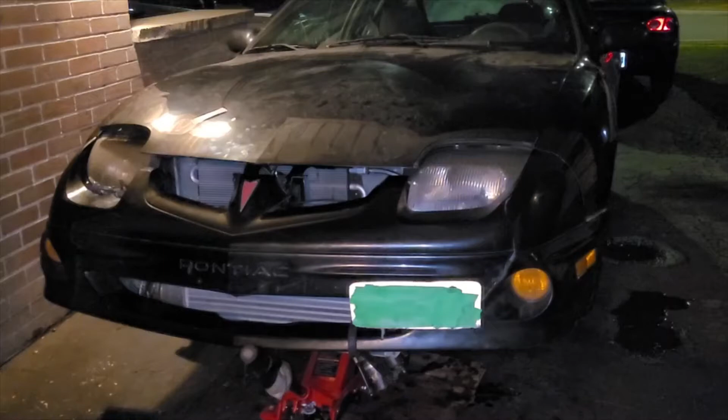Alright, Sunfire needs some maintenance. We had to pull the transmission earlier today. We were ripping it in second gear, we went to shift into third, and all of a sudden, limiter. Just bouncing off the limiter. So, transmission's gotta come out.

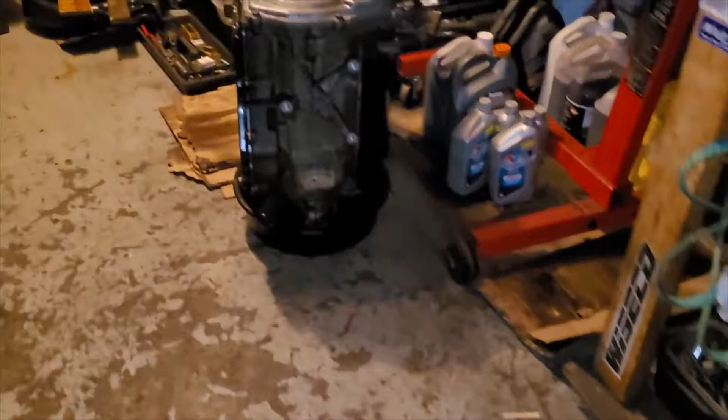As you can see, just the engine in there. For those of you that don't know, this is a 2.2 pushrod engine, and it's got the 4-speed automatic, the 4T40. Right over here, we have it out. It was bouncing off limiter at the top of second. Right when it went to shift into third, limiter.

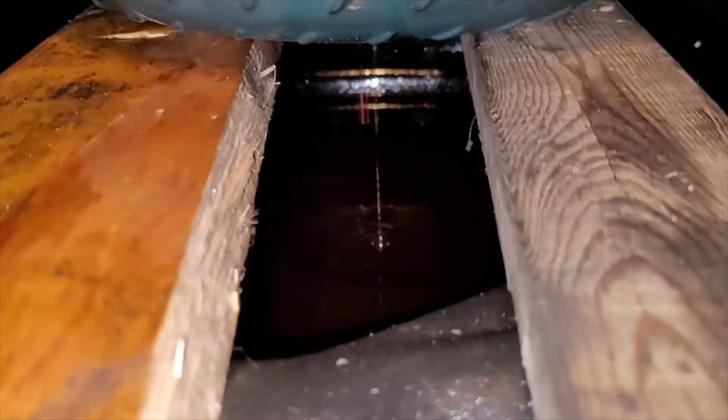So, we got it out. We got the converter over here draining. We're gonna see what the damage is. Here we go, we're gonna open it up on video.

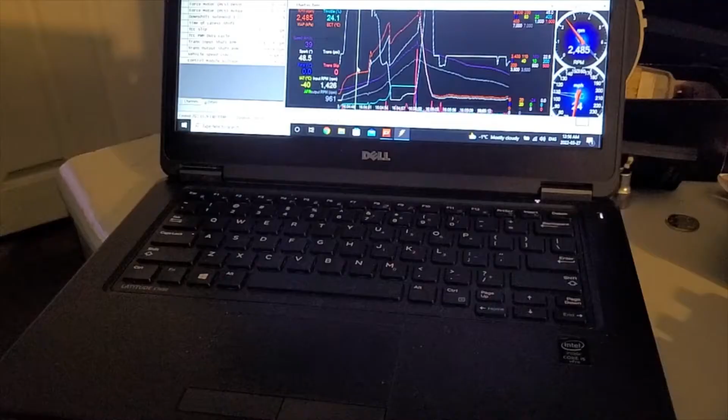So during this catastrophic transmission event, I was actually logging with HP Tuners as well as FuelTech. You can see here we start off the pull in second gear. It downshifts back into first, does the 1 to 2 shift right here. See, the red line is RPM. This is HP Tuners. Second gear, we rev it out all the way to about 6,400.

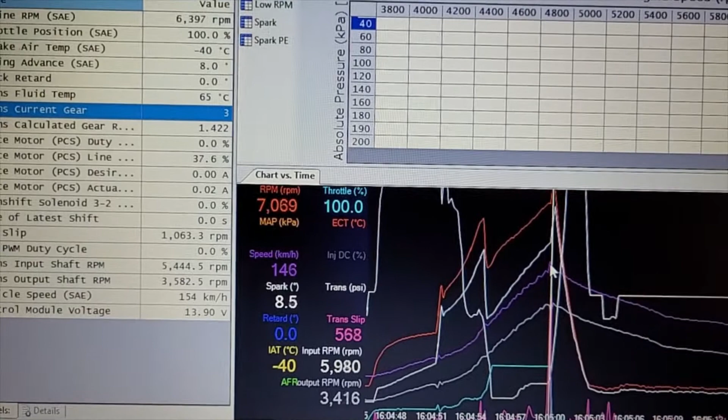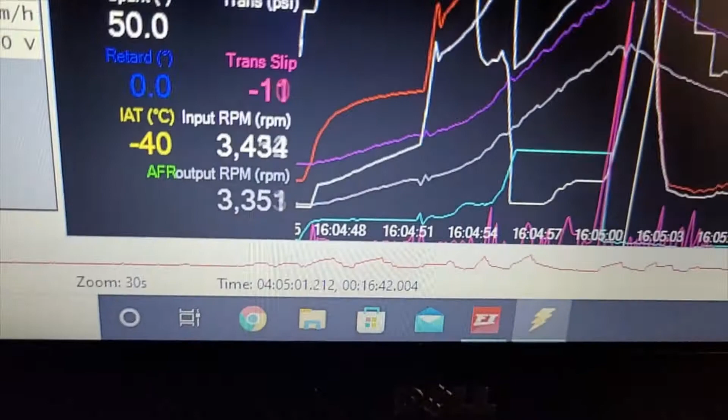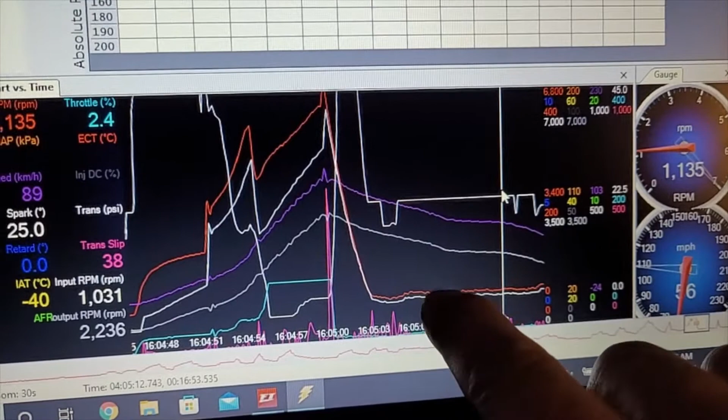Then boom, all of a sudden RPM jumps way up to over 7 grand as third gear hits. And that's it. After that, the power just falls right off. Input shaft and output shaft drop. One thing to note, input shaft and RPM are still close together. Those two lines right there mean the input shaft is not broken. That means something else, like the chain possibly.

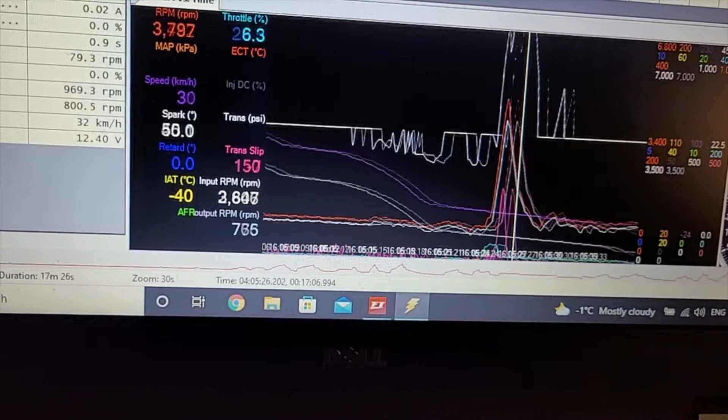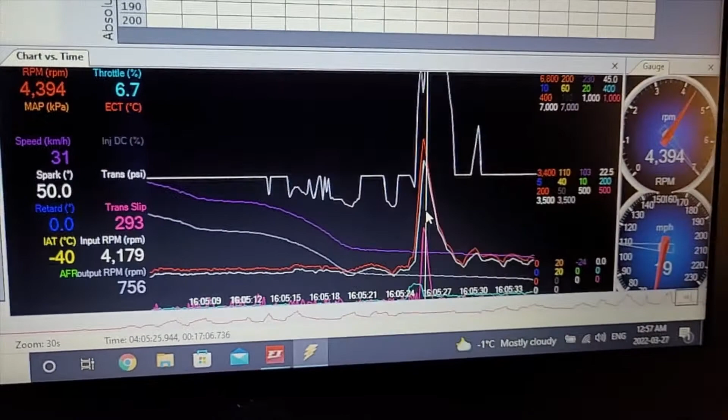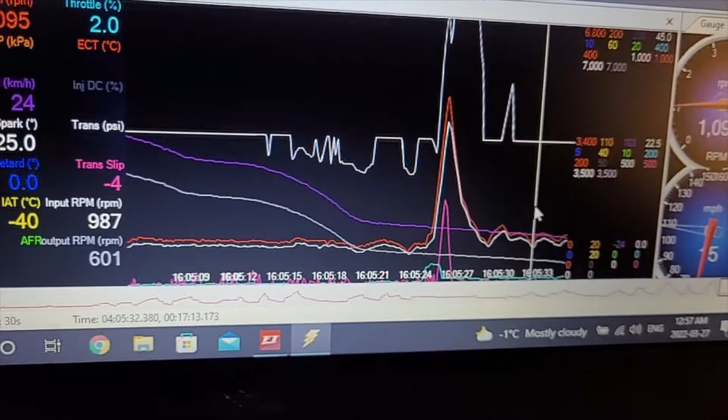So we can see as we turn, we did the right hand turn, then we revved it up a little bit there. You can see input shaft RPM comes up with RPM. That means the transmission input shaft is still connected to the engine, which is a good thing because we have that expensive input shaft in there. But output shaft basically just tapered off because that's tied to the wheels. That's basically wheel speed. Just tapered off and that was it.

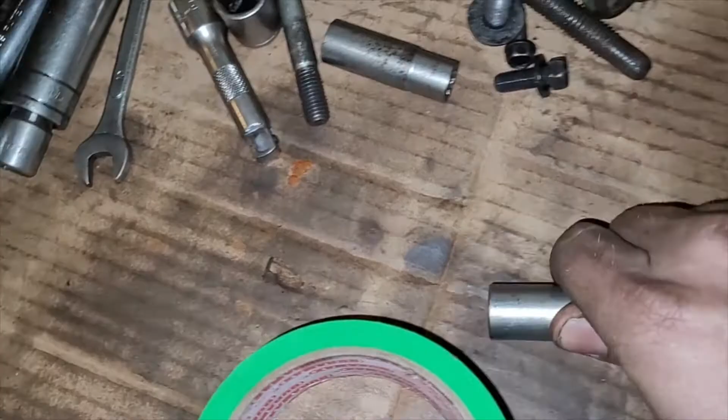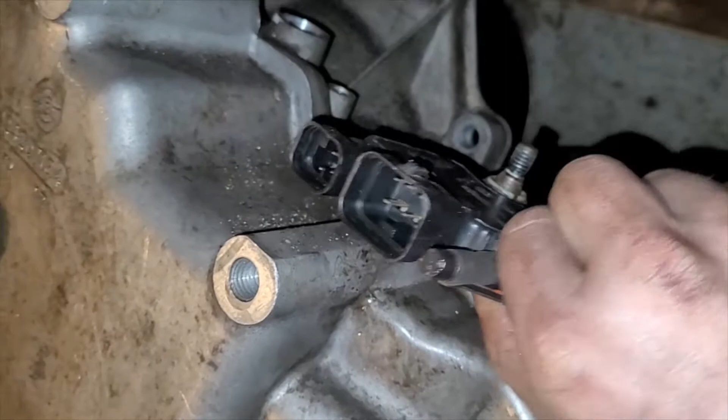So first off, we have to take off this range selector, whatever you call it. It's got, I believe, a 1/2 inch here, and it has a 7/16, I believe. Oh, we already took that one off. There was a 7/16 right there. So this whole thing is going to wiggle off. There we go. I like to put my bolts back.

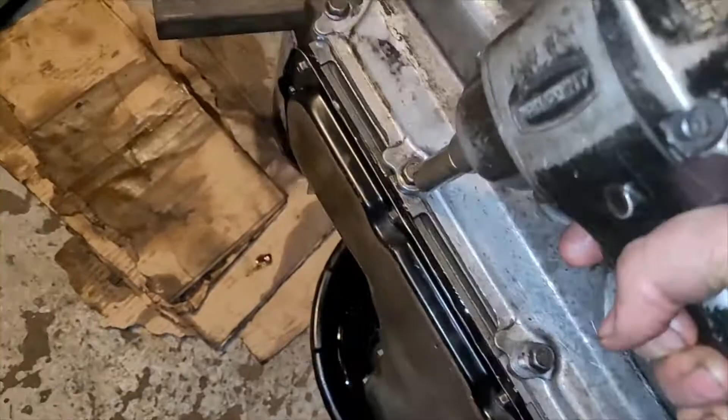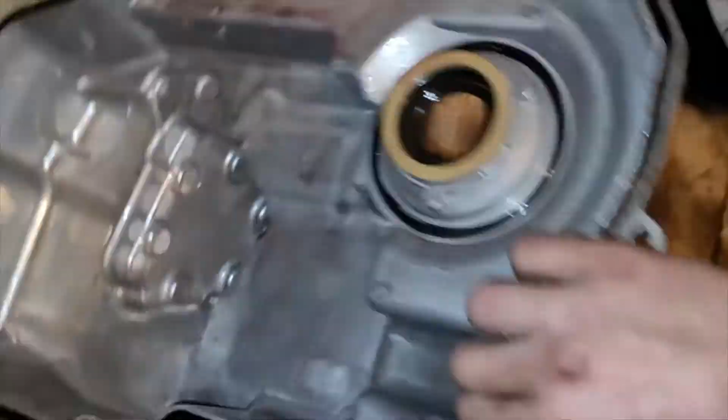Now that the air compressor's off, we're going to remove this thing. A couple dowel pins. There's one right here, and there's one on the left here. I forget, it's one of these ones here. Lift this right off. Let's assess the damage here. I use that as my little tray for all my trans parts.

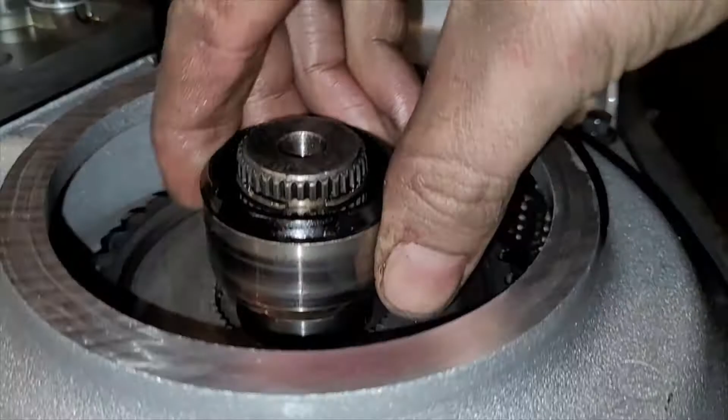Right off the bat, I like to take a look in here. Oh, the chain is loose. So it looks like we definitely broke the chain. That makes sense because the input shaft was okay. As you can see in here, we already got the O-ring off. We have a 4T65 input shaft that we trimmed a little bit. But this looks like it's going to be a relatively cheaper fix.

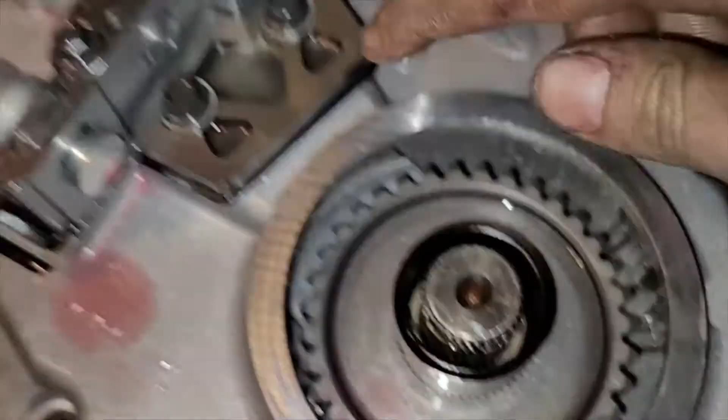We just have to get all the bits of the chain out of here. That chain should be up against this gear here, and it goes all the way here to the input shaft, which is down under the pump. So we'll tear it down and we'll see where the chain went.

So first thing is the shift linkage. This is what moves around when you're going into park, reverse, drive, whatever. As you can see, that detent, I think they call it, moves around. So we'll leave it in park and we'll release this. This will be loose, so you have to be careful not to lose that. It'll move around when you pull off the valve body.

We have our electrical. These are the A and B solenoids. The force motor, this controls the transmission pressure. Over way back here, we have the torque converter solenoid and the main pressure switch, I guess you call that. And this right here is the pump, generates the pressure.

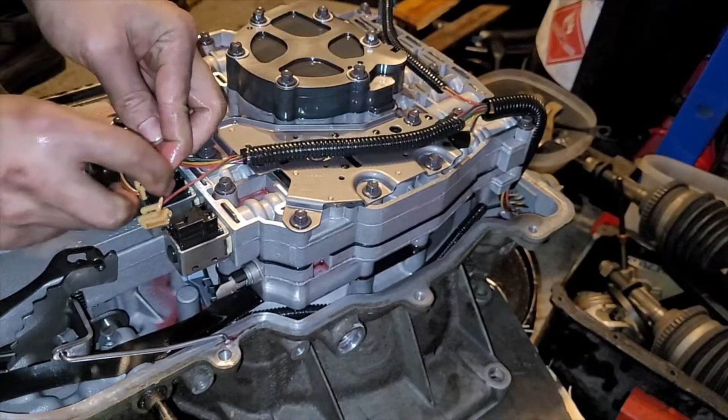So you want to use two hands with these things very carefully because they get brittle, especially if you've overheated the fluid. Release all these. And there we go, the electrical harness is disconnected. Put it off to the side. Now pretty much everything here is 8mm bolts, except these two that hold the second gear back in place.

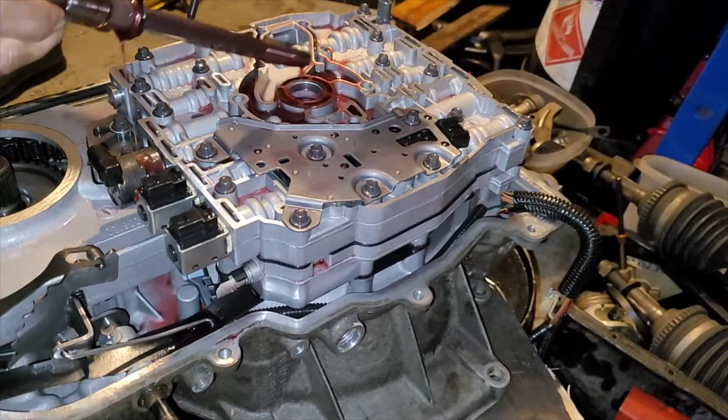So now we'll remove the pump. These I do not torque down at all. Pretty much I leave them at like 8 foot-pounds or something I think it calls for. Look at that. And that's the pump shaft. Everything here is just fine because we had good pressure, just broke the chain, so we don't have to worry about any of this stuff. Put that all in the bin. I like to keep the bolts on the parts. When I put it back, it makes it easier.

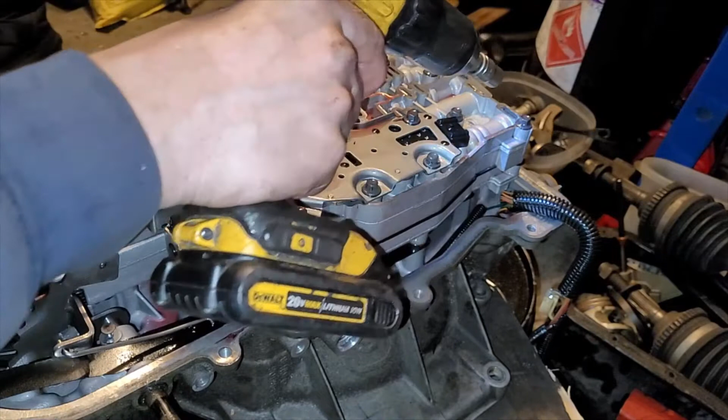So we're going to try to remove the channel plate and the valve body as one piece. To do that, you actually can leave a few bolts in. Those ones only connect those two together. There's a couple bolts that you have to leave in. You'll see in a second here.

We're going to start off by the second gear support. These two bolts are 10mm and they hold the second support inside the unit. They pull it up to the channel plate, so they're really tight. Whoops. There we go.

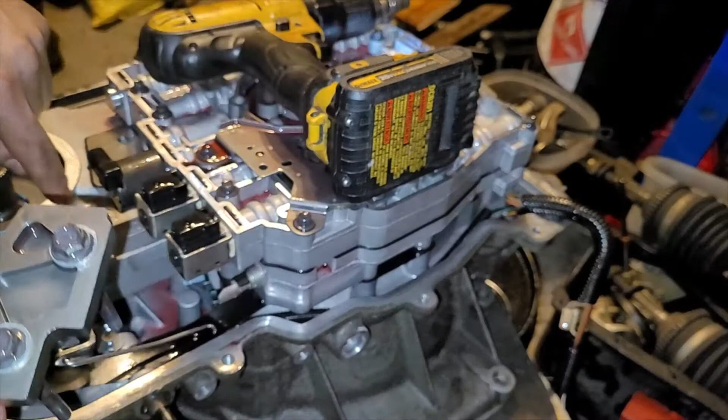And there's a retainer sort of thing on it. Pull that up nicely. That is what holds second gear. The second gear fluid pressure holds it to the channel plate, so it's super critical that you don't strip those or you don't get them too loose. I don't know what the torque spec is specifically, but if you over torque those, you strip the second gear unit inside there. You'll see in a second.

Now there's a few that we leave in here that will actually allow us to not mess with the gasket here, because these two will come up in one piece. So we'll see if we can remember which ones they are. We get the extension over here. I don't think these should be in there too tight. So these are actually 8mm. Those two were 10, these are all 8. So I know this corner we leave that one in. The two far ones here.

These two on the pressure switch have to come off for sure, but I think all the other ones stay. So just the top two come off. This one for sure. That one stays, and these three stay. But this one comes off. And then all the surrounding ones have to come off for sure.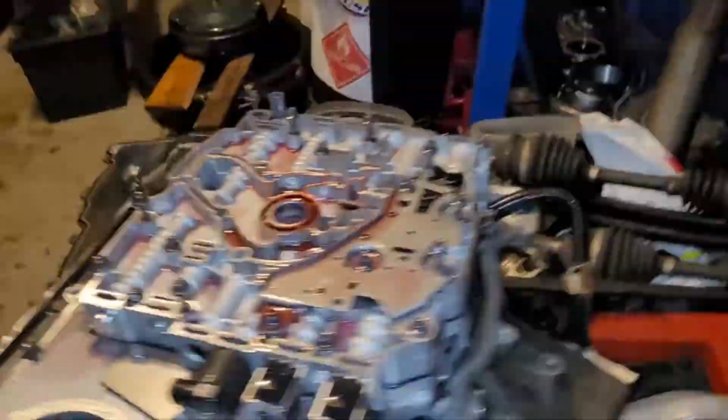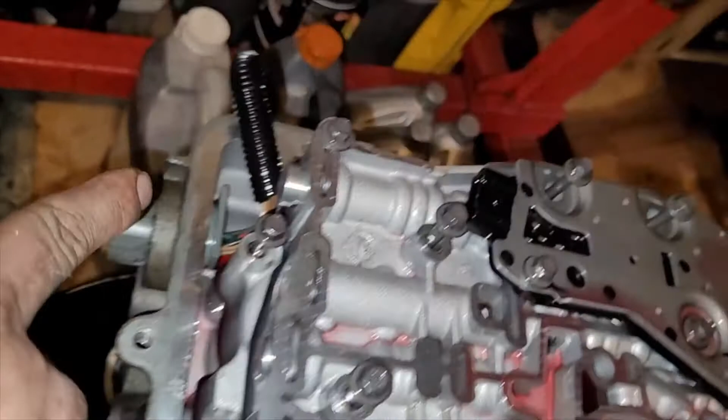Sorry if you can't see this. I'll get a better shot of which ones I'm taking out right now. Just take the camera here and show you guys. So everything on the outside comes off, like these two, this one, this one, this one, this one. That one there, that one there. That one stays. That one comes off, comes off. It stays. I've actually marked the ones that stay with the black marker before I did this, just so I knew. All those come off.

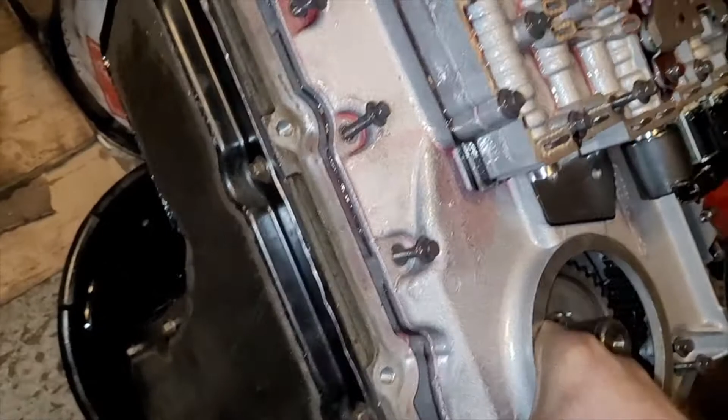And the only two that come off are these two. Everything else is able to actually stay, because they secure the valve body to the channel plate. So the whole thing actually should come loose now. Let's give it a wiggle. All right, we got our screwdriver here. We're just gonna lightly pry in a spot that doesn't have the gasket without pulling the whole thing over. It should come up. Let's see, I think maybe we missed something.

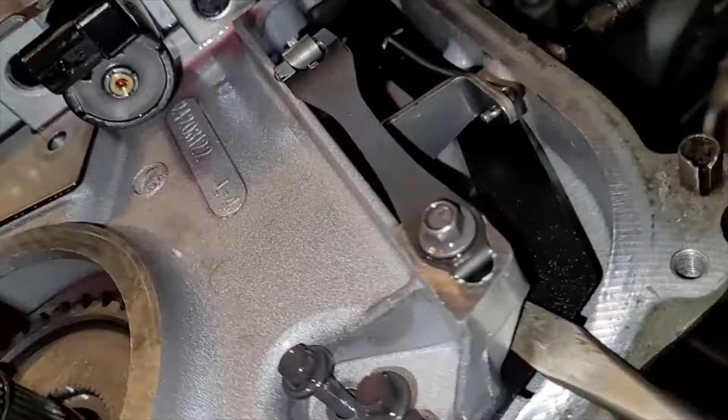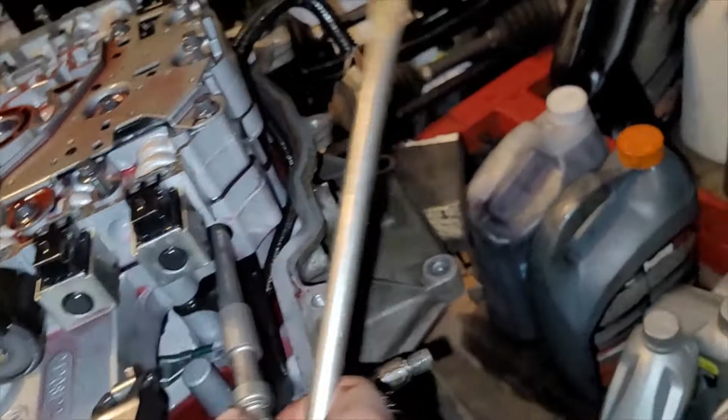That one, that one, that one. I think actually we forgot this bolt right here. Let's go ahead and get that one. Try this again. I like to pry from right here. There we go. And up here. Very nice. We'll probably take this manual shifter out before we lose it. Oh, looks like it won't go. Let's see. Now we just put it in a bind. That's okay. We'll pull that out after.

But for now, we can lift this whole channel plate valve body as an assembly right out. You got to separate this side too, so get the screwdriver, pry in a spot that's safe. It's coming up soon. There we go. There we go, she's up. Put the camera back down. I'll pull this whole thing up.

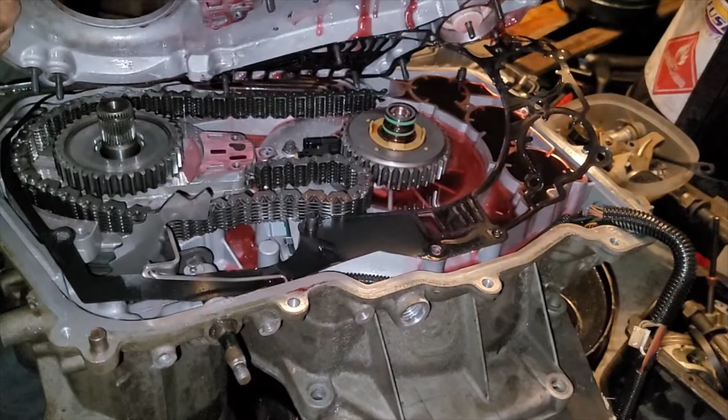Alright, we'll lift this channel plate, valve body assembly, without ripping the gasket underneath, hopefully. That's the goal. Because we do not want to wait weeks for a new gasket. It's stuck in the corner. That's okay. Very gently release the gasket here. We have some damage in here for sure. There we go. Oh, fluid and bolts going everywhere. That's okay.

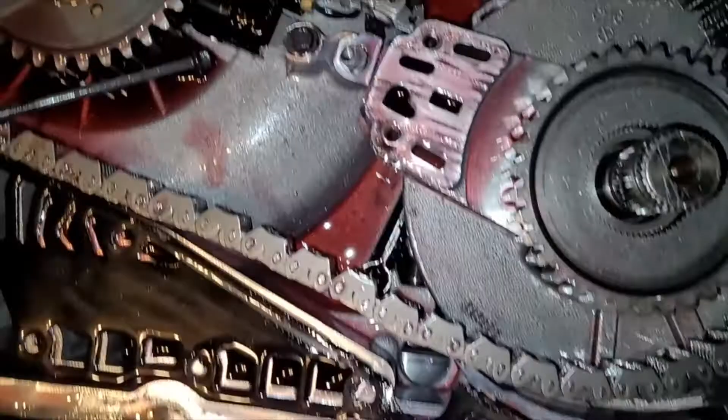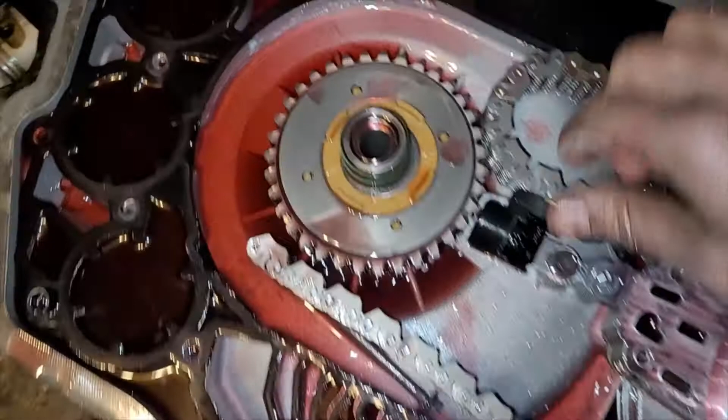Get a shot of this carnage over here. The chain definitely snapped, as you can see. And it lodged itself in there. Wow. Just a second here. So one side is free. I just hope there's no other damage. Oh, there it goes. The chain is free. Look at that. Absolutely brutal. This is supposed to be the wide chain as well. This is the 7/8 chain.

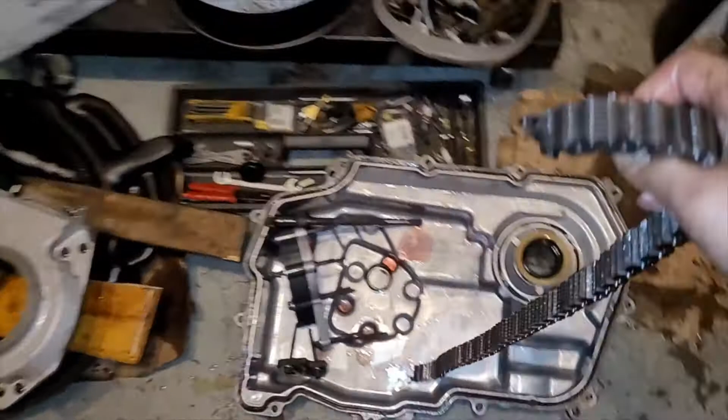It's supposed to only break in the heavy Grand Am cars or whatever. My car only weighs about 2,500, so I don't know what it was yet. Could have been lack of lubrication. Could have been maybe the shifts were set too hard, something like that, but I had that proper. That goes up. Those two master links go up.

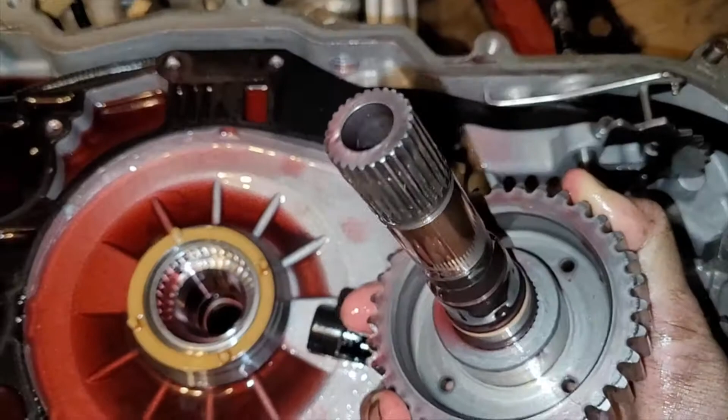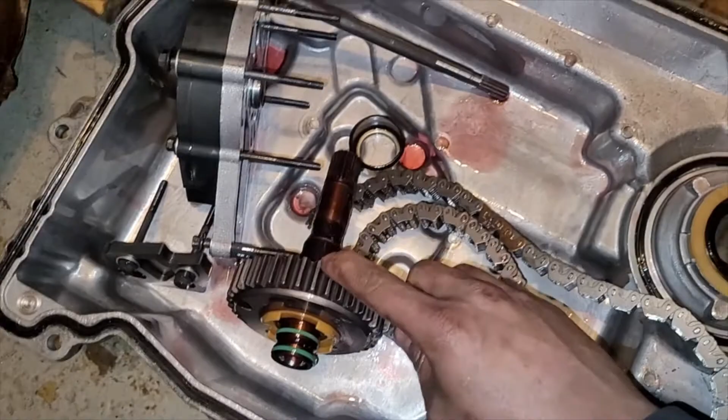And let's check for other damage here. The input shaft sometimes has problems. But this is a very expensive unit from ZZP, Canadian, eh? And yeah, it looks completely fine. That's good, because this is like 700 Canadian shipped with duty and everything, so I'm glad that did not break. And there's a washer, or thrust washer, whatever you want to call it, that goes right here. We will keep that in there for now.

Our gasket we will be saving because we are cheap. Pull it off the dowel pins right there. I like to hang it up on my engine stand right here, my engine hoist. There's the wide gear from the 4T45.

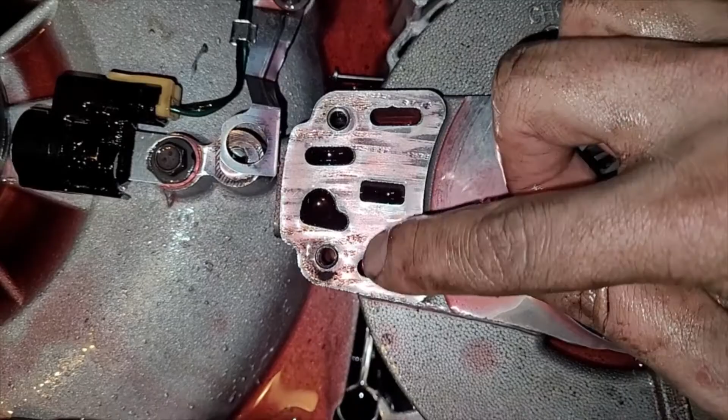And this is what I was talking about. This is the second gear drum. All the fluid pressure for all gears goes through here. So there's like third gear, second gear. I don't know which holes exactly, but get that out of there.

So yeah, this thing, you have to make sure you do not strip out these two bolts here. You'll have a bad day. You'll lose line pressure. You can actually see it's kind of rough here. This thing's been probably knocking itself into the channel plate real hard from the shifts. You can see right there, there's some pitting too.

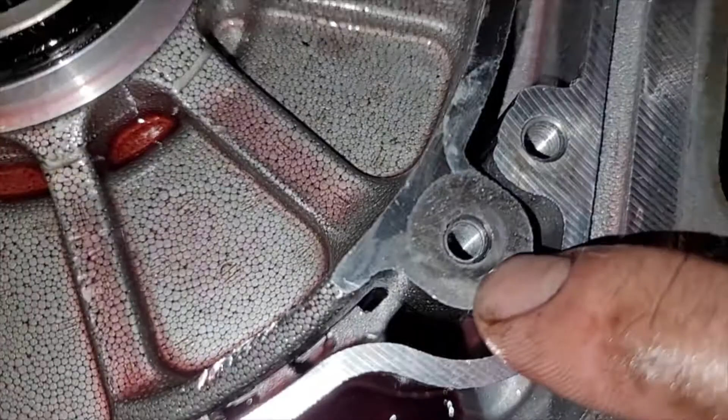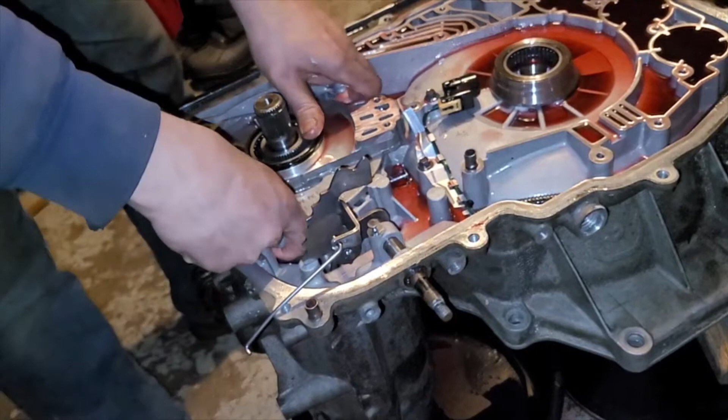But I'll probably slap it back in. You know how it is. All right, let's take out the second gear support. Now the apply piston is right here. This whole thing applies the gears together, or I should say applies the clutches and steels against the backing plate. You'll see when we take that out.

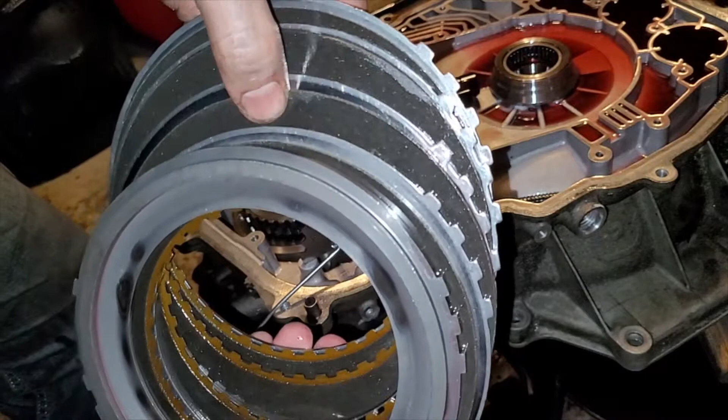Put that over there. Here we have the clutches and steels and the backing plate. So let's just quickly look them over. Everything looks perfect in second gear over here. They look exactly how I put them in. Ooh, that one got a little hot. Normal though. And that got hot, but I had that machined. So second gear, perfect.

Now inside we have the reverse. We'll take out the band first, if we can get it out. It's a little tricky, you gotta wiggle it out. I should have taken out the accumulators on the inside. Oh, there it goes. Or sorry, the servos are under the pan, I should say. Should have taken those out first because that actually holds that band in. There's like an anchor that actuates.

And in here we have reverse. Pull that out. Definitely won't be seeing any issues here. We had no problem with reverse, so I'm not even going to take that apart. Usually you want to check your clearance in here. See, we got about 80 thou. No big deal in there. That looks good.

Now what I really want to see here is this is the third gear stack. This whole thing comes out. Inside here, I've done a few little modifications. We're going to see what that looks like in a second here. Third gear clutches and steels are all inside here. Now before we look at that, we're going to take out the planetary junk inside here. You always have to check these things for wobble or play, all that stuff. I'll check them over later.

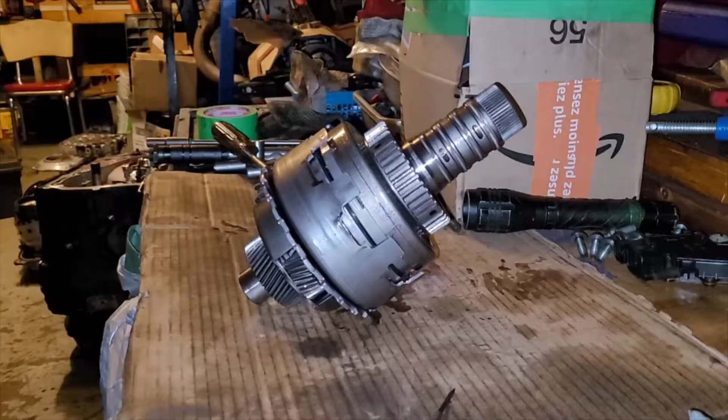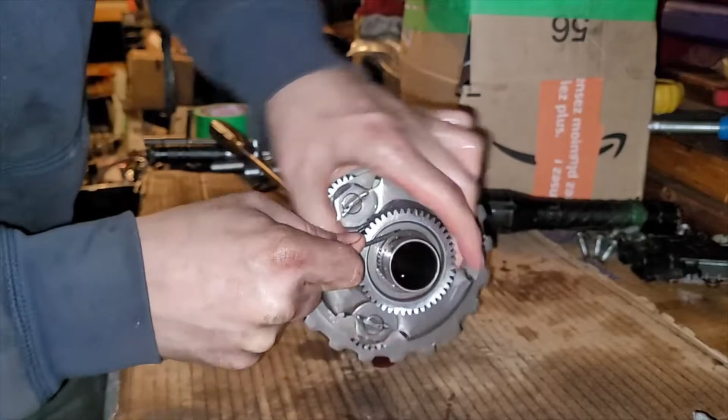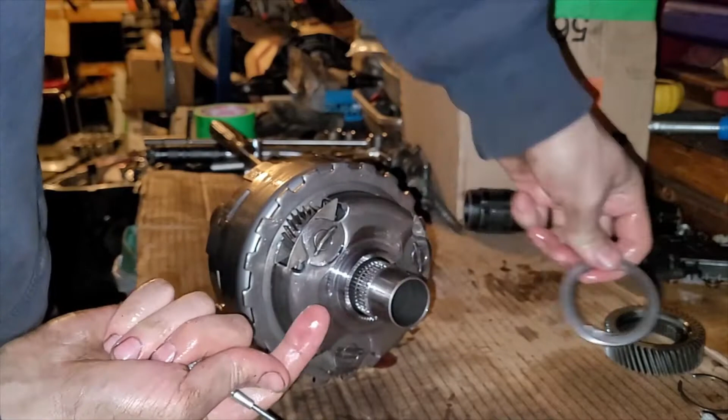All right, so this is the third gear stack up. Inside here, there's also the coast clutches and a couple things, so we'll take this thing apart. Hopefully everything looks good, because I did a few little improvements to it. First, we got to get off our snap ring holding the sun gear. And that comes off. Got our bearing. And we got a couple other pieces. I'm no trans expert. I don't know exactly what they're all called, but sun shell, sun gear, whatever. There we go.

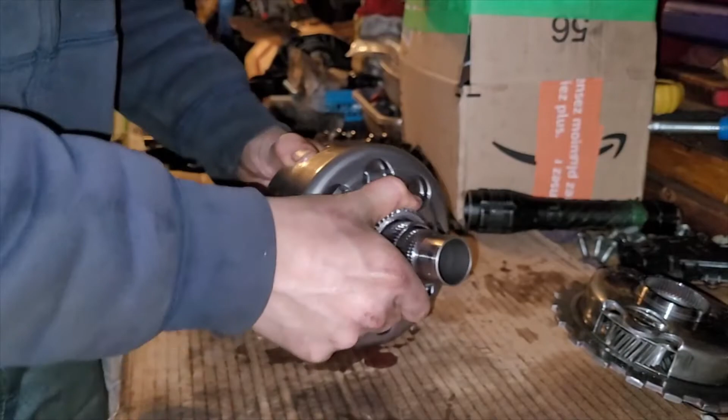Ooh, everything looks okay. Whoops. Whole bunch of pieces there. Don't mix them up. We got our stack up here. Proper clearance. Nothing failed in there. We have our welded sprag right here. Looks like all the clutches. One of them looks a little different colored there in the middle, but I think we are in luck.

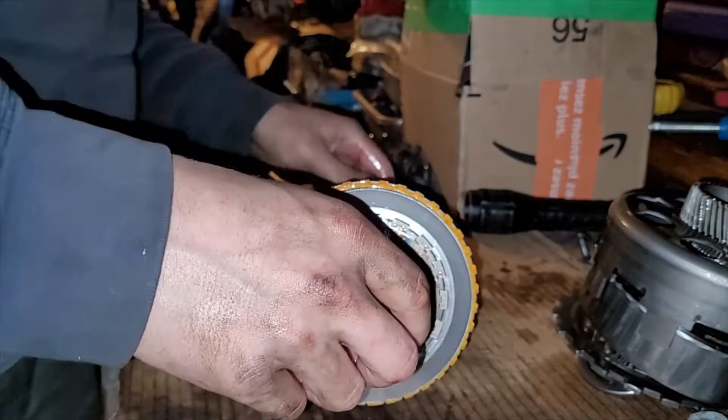What we've also done is a different drum. I've actually filed down a couple spots here so the drum sits deeper in there, so I can fit an extra clutch and steel in there. And I've also shaved down the backing plate, so I was able to go from the normal six clutch stack up to a 7. So 1, 2, 3, 4, 5, 6, 7, which adds a little bit of holding capability for the third gear, which is a problem in these units. Big problem. So here we have another washer.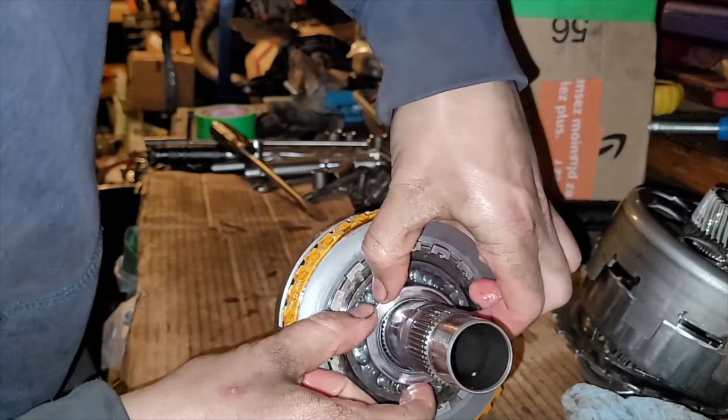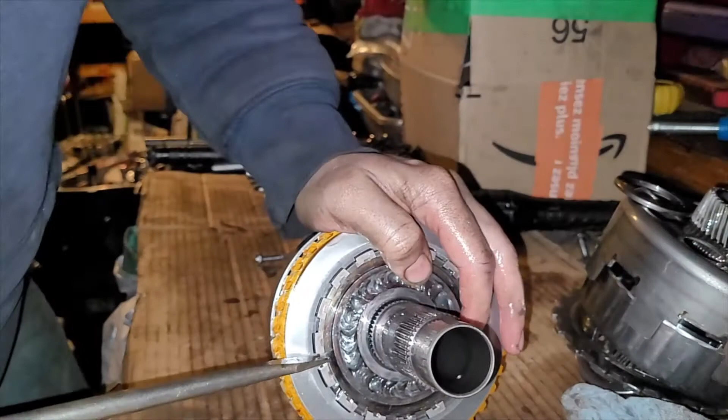And let's get the snap ring off here. This one's a heavy snap ring I put in here. It's from a different drum, actually. It's hard to get out for sure. You gotta kind of work it with one screwdriver. There it goes. Now everything will come off. Now let's take a closer look.

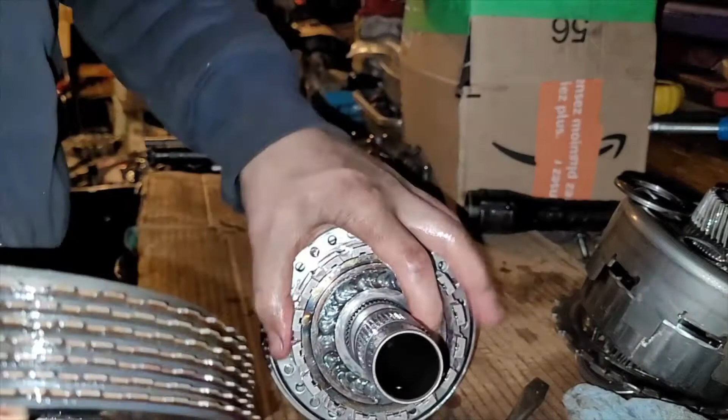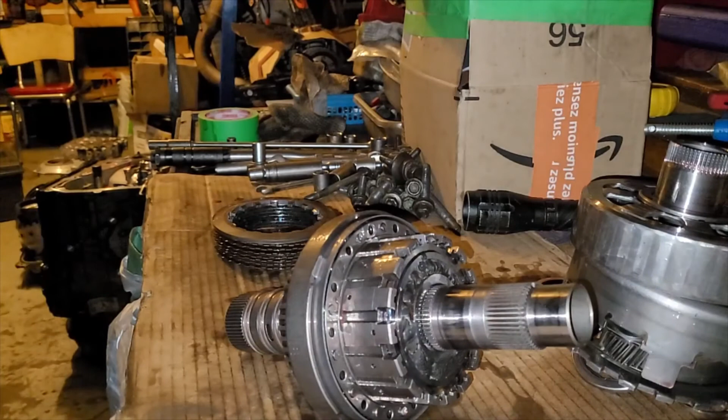Now to fit the extra clutch and steel in here, I did a lot of work. I actually manually shaved each clutch like 5 thousandths each, just to add that little bit of extra clearance. So everything looks perfect. Happy to see that. We got a 7 clutch stack up in this thing. And here we have a couple tricks. We got a welded sprag here. The apply piston looked a little messed up. We'll probably have to change that. So no big deal. We'll get this thing back together and start doing pulls again.